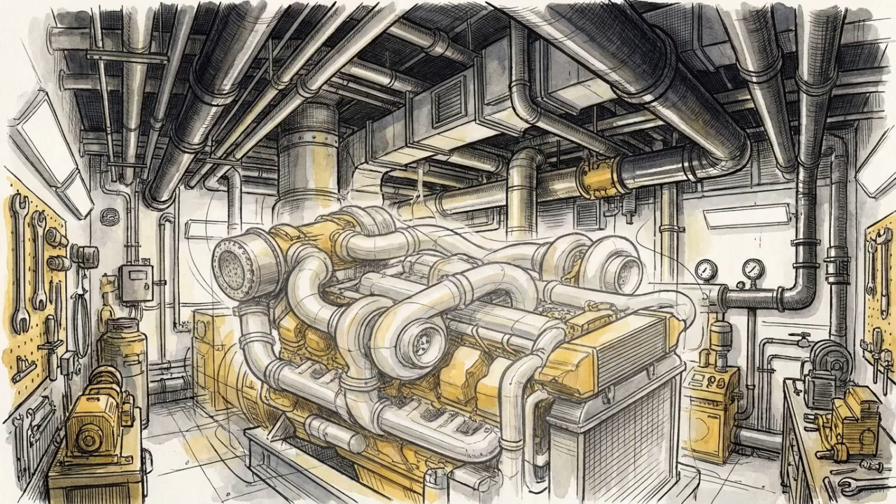Offshore oil platforms operate in some of the most unforgiving environments on Earth, requiring massive, uninterrupted electrical power just to keep their systems online and the crew safe. Enterprise data centers face a similar engineering challenge. They require mission-critical power generation, but have to fit it into severely constrained mechanical rooms or skid spaces.

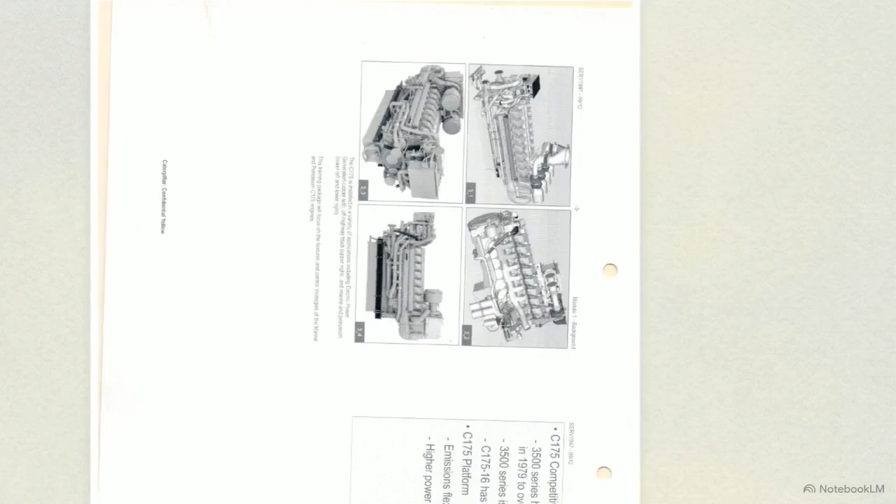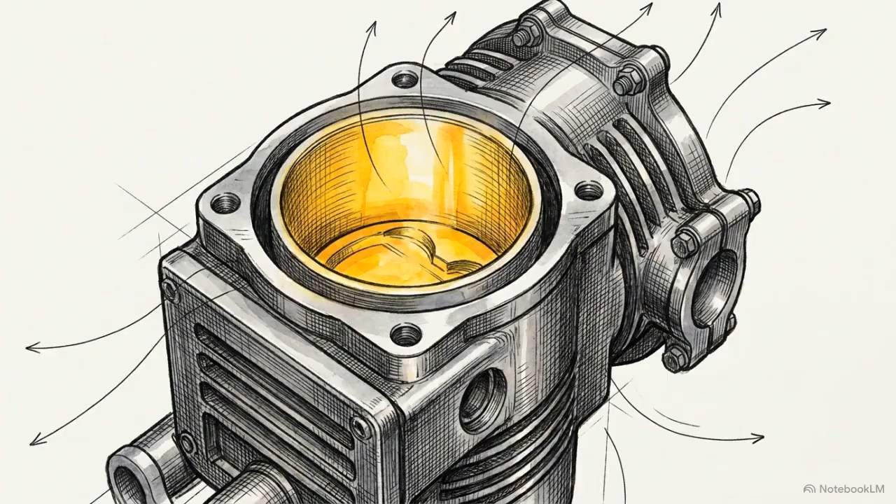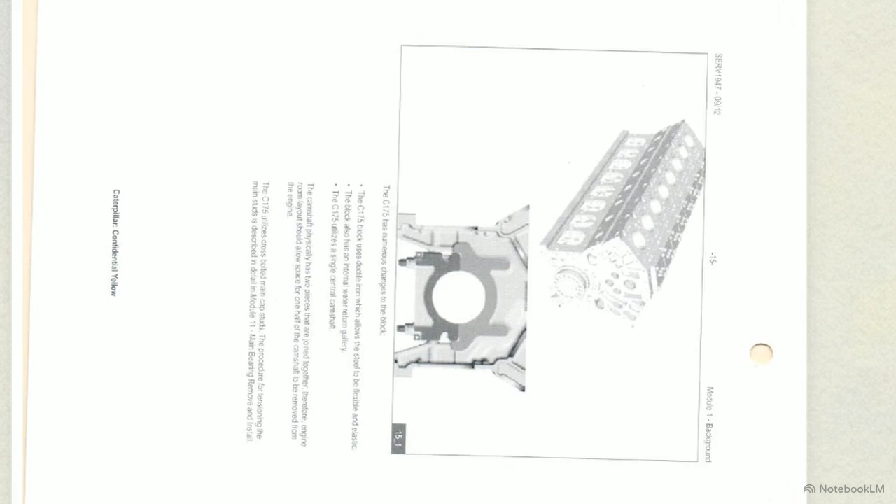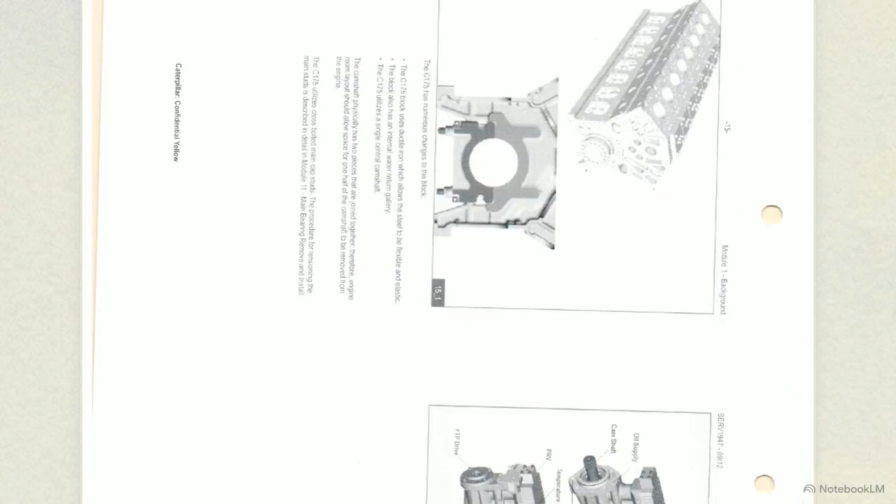Surviving it required a complete architectural redesign from the ground up. The foundation is the deep skirt engine block, cast from a high-tensile ferrite ductile iron alloy to prevent stress cracking under heavy, continuous loads. Inside, the geometry relies on a single central camshaft responsible for actuating 64 total valves across the entire engine.

The rotating assembly paired with this block utilizes one-piece forged steel pistons and a highly specialized connecting rod design. These connecting rods are precision fractured during the manufacturing process. The rod and cap separate along a jagged crack line, creating a unique microscopic interlocking surface that can only ever mate with its original partner.

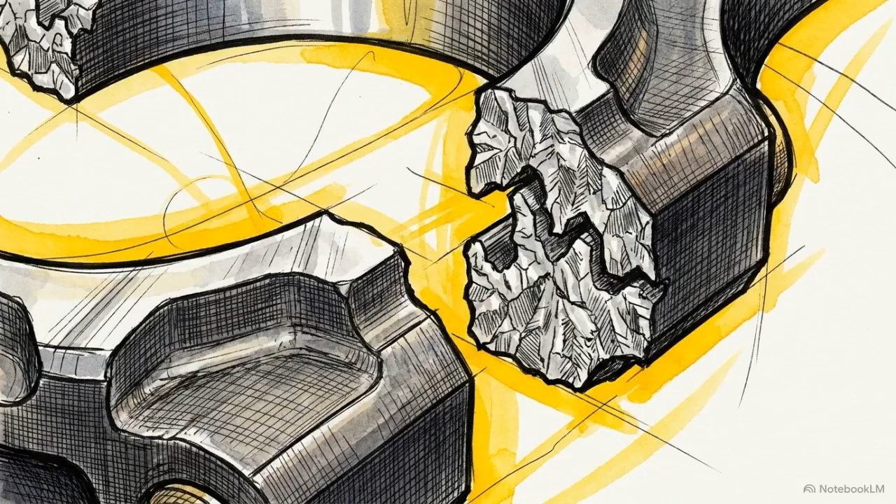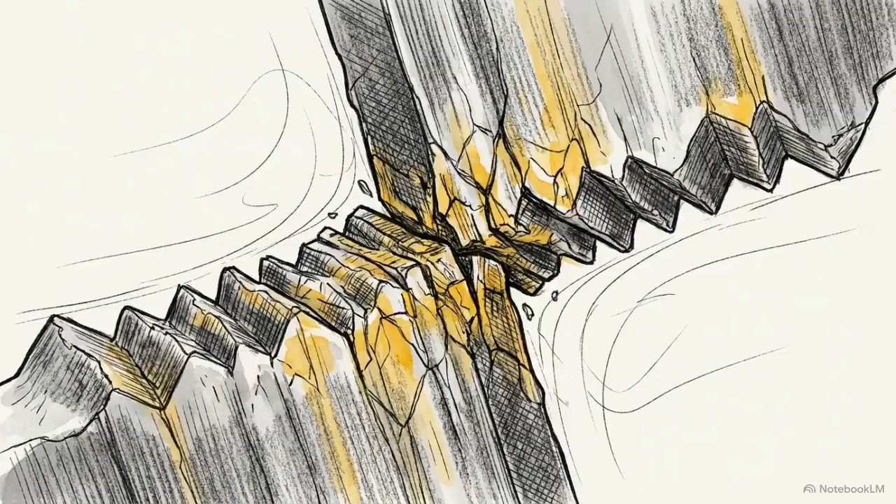A technician can never mix and match rod caps between cylinders, even temporarily during a bench rebuild. Swapping a cap destroys that fractured mating surface. Without that exact lock, the bearing shell can rotate under load, leading to total catastrophic rod failure at high speed. The mechanical foundation of the C175 offers zero margin for legacy mechanical slop or technician complacency.

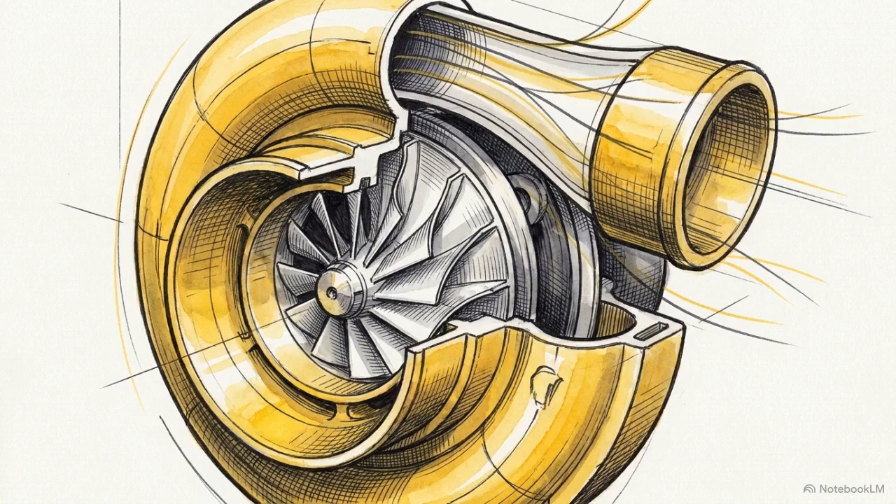Turbocharging the C175 is an exercise in maximizing molecular air density. The engine breathes through cross-flow cylinder heads, a design that strictly isolates the intake and exhaust ports on opposite sides of the cylinder to optimize gas exchange.

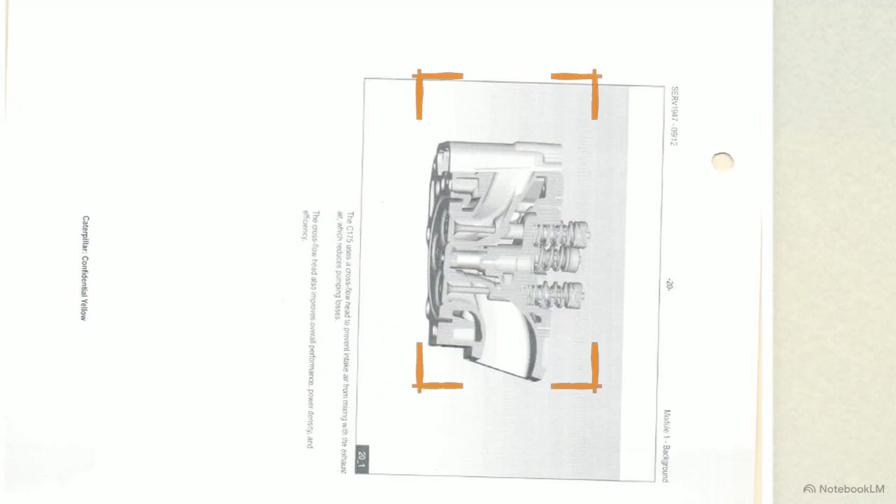Before that pressurized air enters the intake, it passes through the separate circuit aftercooler, or SCAC, which strips away the heat of compression to ensure the air remains dense with oxygen molecules.

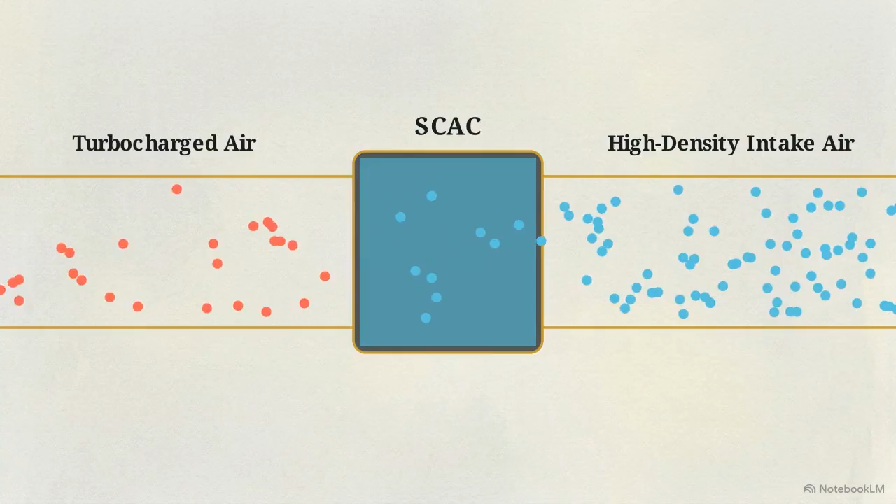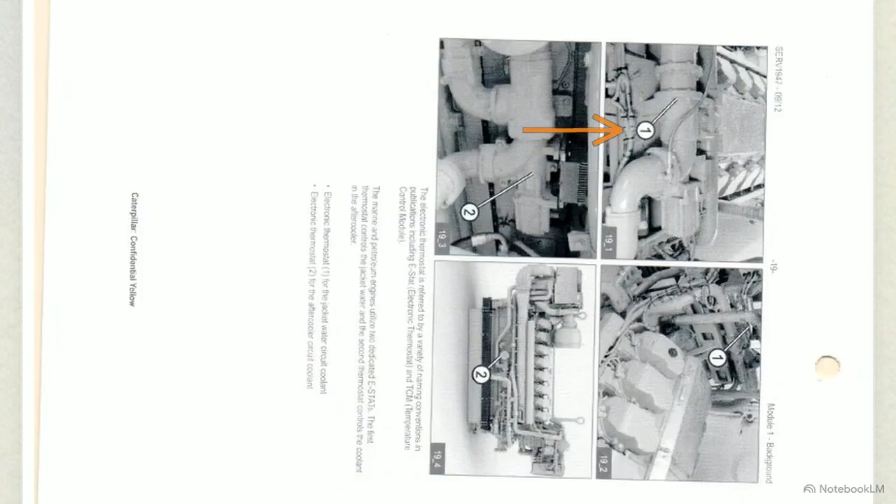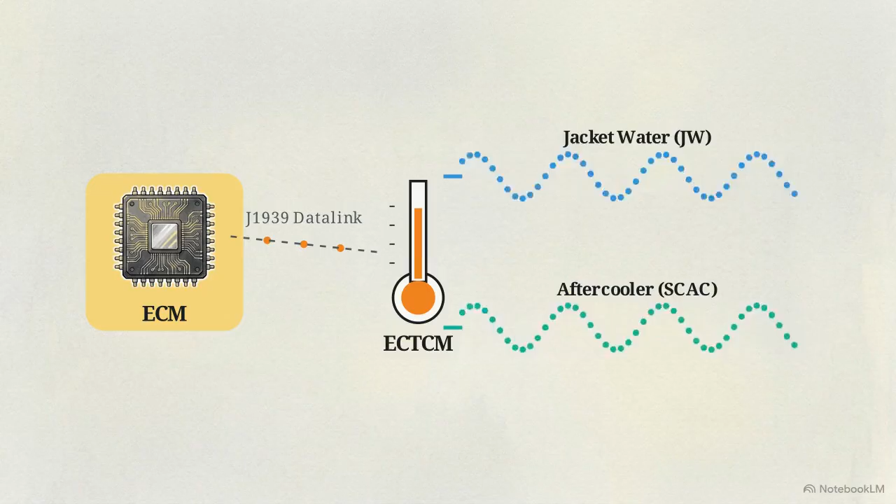Older platforms relied on passive mechanical thermostats for cooling. The C175 utilizes an electronic coolant temperature control module. The primary engine control module sends real-time J1939 data link commands directly to this module, actively dictating exact jacket water and aftercooler temperatures based on current load. Thermal management here is an active, digitally controlled loop.

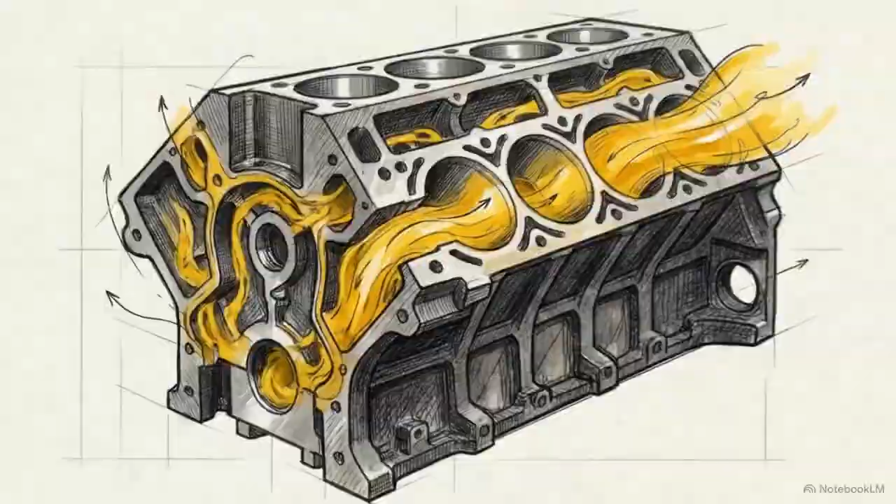Maintaining strict temperature parameters is a primary requirement for hitting the engine's power output targets. To deliver 3,500 horsepower while meeting modern emission standards, the platform abandons older mechanically actuated unit injection in favor of a high-pressure common rail fuel system.

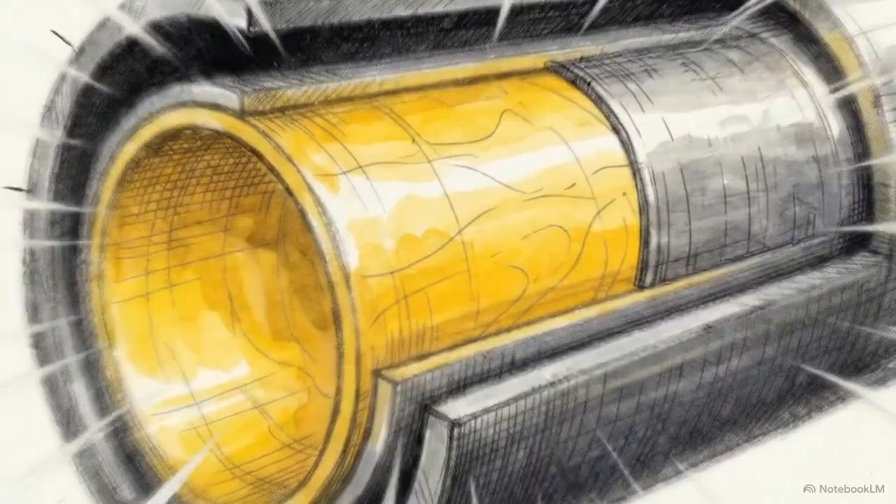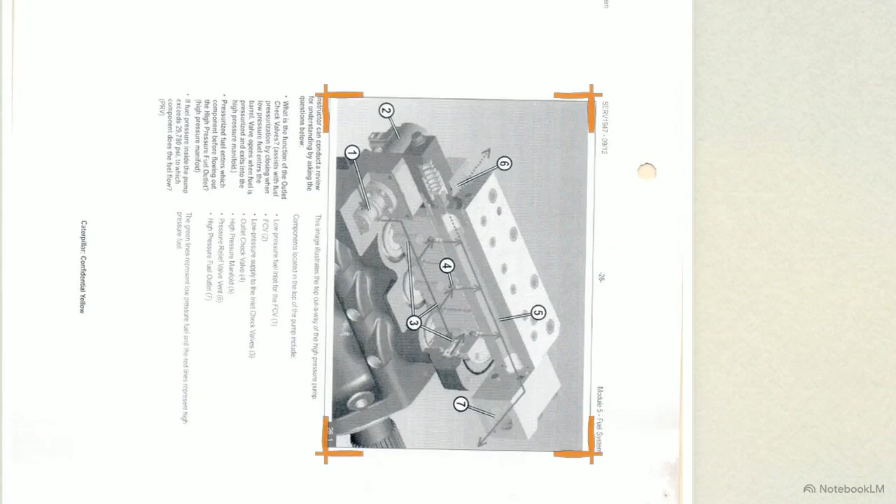This system operates at a lethal 180,000 kilopascals, over 26,000 psi. Containing that much kinetic energy safely requires specialized double-walled fuel lines. The mechanical source of this massive pressure is the Woodward high-pressure pump, mounted directly to the front housing.

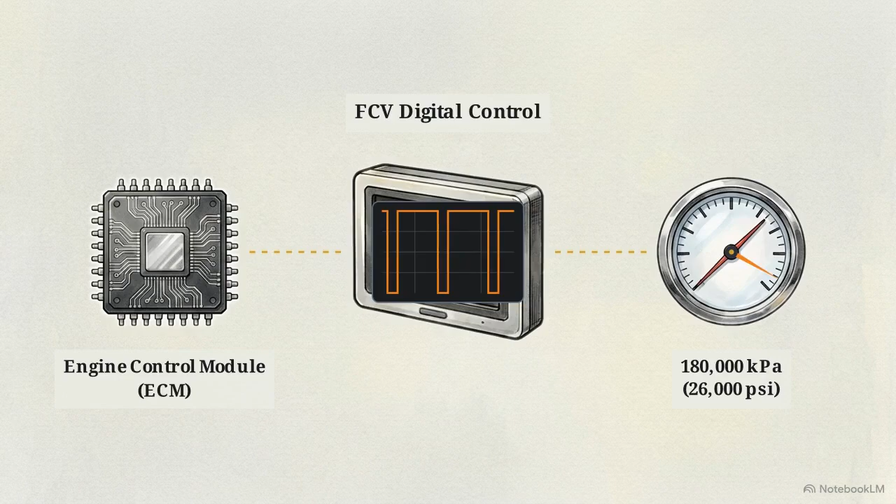The single most critical component on this pump is the fuel control valve. The fuel control valve acts as a gatekeeper. It receives a pulse-width modulated electrical signal from the ECM, constantly adjusting exactly how much of that 26,000 psi reaches the rail. From the pump, this highly regulated fuel flows out into the common rail manifolds, where it waits to be dispersed by the individual electronic injectors.

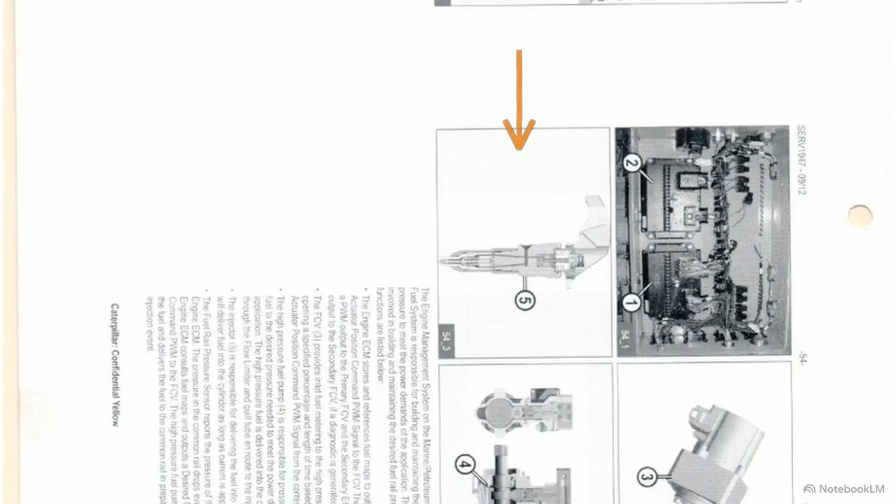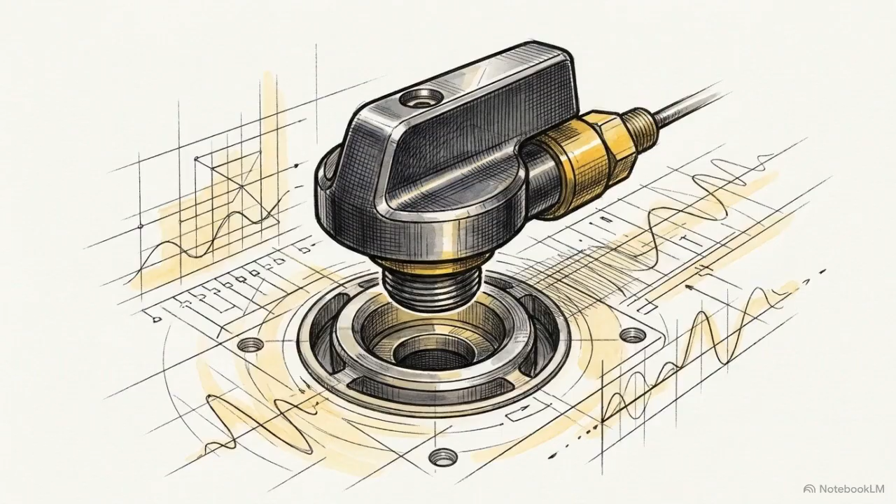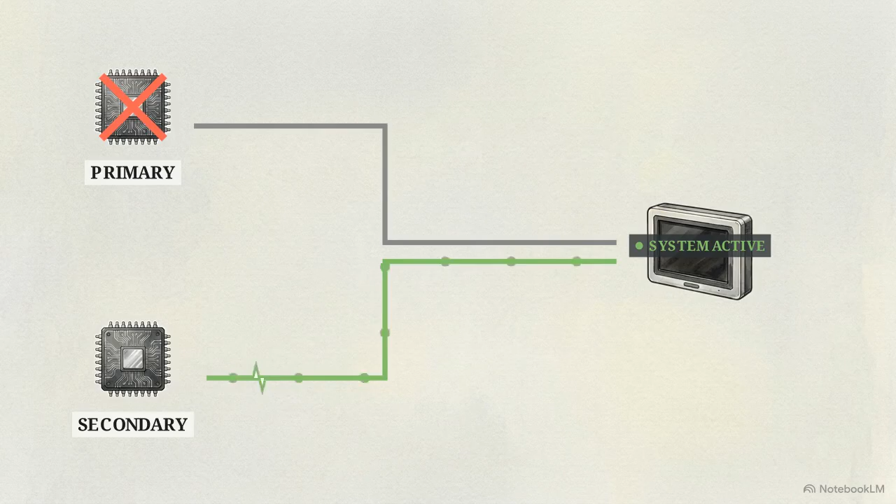The immense physical forces generated inside the block rely entirely on the fuel control valve's microscopic millisecond by millisecond digital gating. Because the fuel and thermal systems depend on continuous digital instruction, the engine requires absolute electronic redundancy to prevent catastrophic failure. Marine and petroleum applications achieve this using a dual-ECM architecture, pairing a primary control module with a secondary backup.

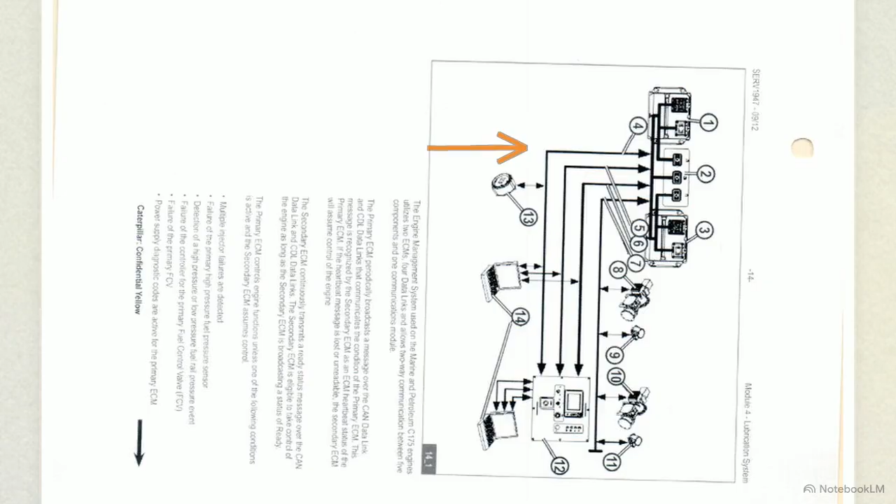The primary ECM continuously broadcasts its operational status, a digital heartbeat, over the CAN data link. If the secondary module detects that this heartbeat is lost or unreadable, it instantly assumes full control of the engine's functions.

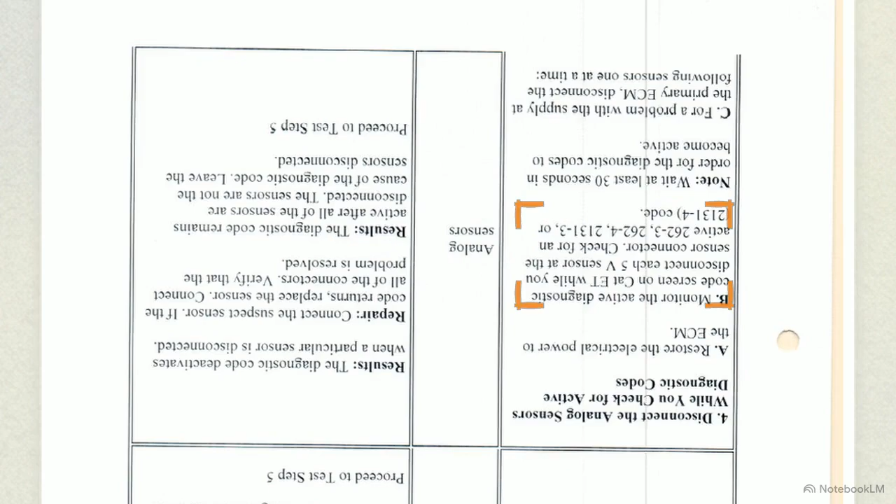When troubleshooting this digital architecture, technicians must verify the regulated 5-volt and 8-volt electrical supplies feeding the active sensors. Diagnosing these circuits requires probing the wiring harness for electrical opens or shorts and trusting the active diagnostic codes rather than relying on physical intuition.

Successfully repairing the C175 means shifting your diagnostic approach. You have to stop looking for traditional mechanical leaks and instead learn to read the digital data stream.

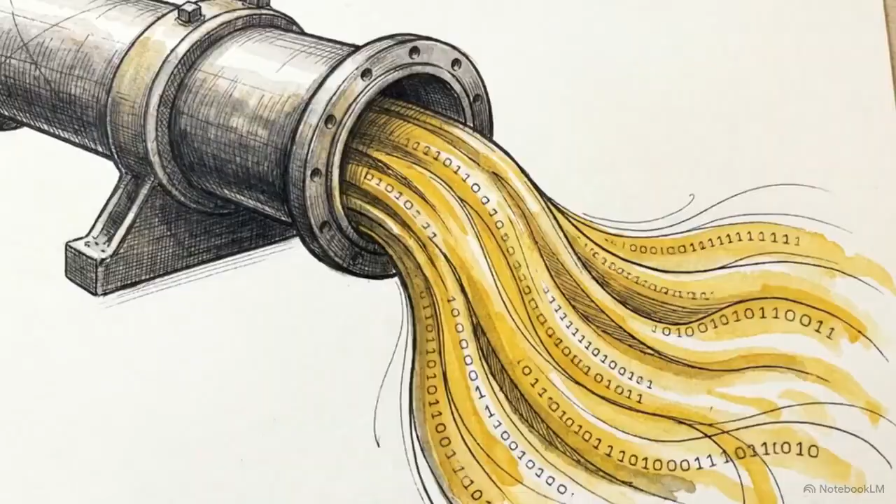Cranking an 85-liter high-speed diesel before oil has fully circulated will cause immediate catastrophic dry start damage to the bearing surfaces. To prevent this, the engine uses one of two mandatory pre-lube strategies: continuous, where oil circulates 24/7, or automotive, where cranking is physically locked out until sufficient oil pressure builds.

Beyond the initial startup, how the engine is deployed, specifically in a standby versus a prime application, radically alters its long-term maintenance schedule. Standby units face infrequent, full-load bursts. They require oil and filter changes based on a strict calendar limit of 1 year or 500 hours, with valve lash checks scheduled at 2,400 hours.

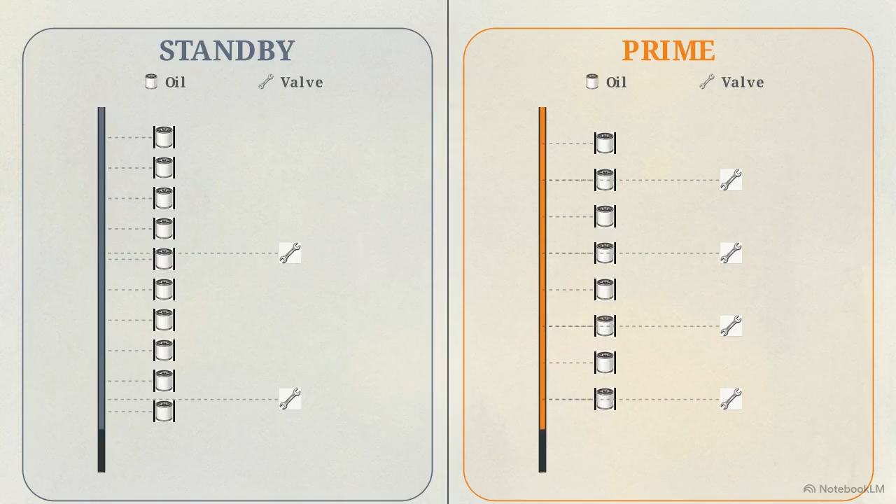Prime power units run continuously. While their constant operation extends oil change intervals out to 600 hours, the continuous heat cycles double the physical wear on the valve train, pulling the valve lash check down to 1,200 hours. These schedules reflect exactly how contamination and thermal fatigue accumulate in the real world across different industries.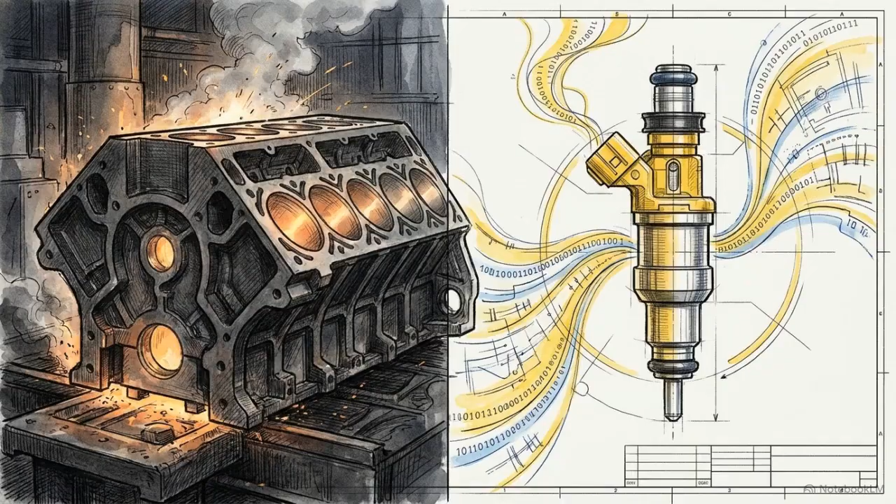The C175-16 generates its extreme power density through a careful balance: a highly rigid, unforgiving mechanical block paired with ultra-precise high-pressure fuel delivery. Treating this platform like an older 3500 series engine, swapping fractured rods, ignoring data links, or guessing at fuel pressures will destroy it.

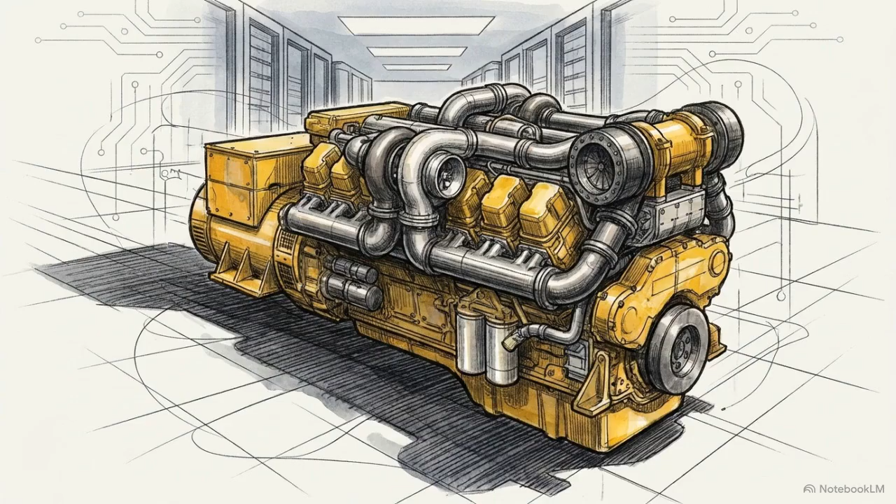Mastering the C175 requires a technician who respects its microscopic physical tolerances just as much as they trust its digital architecture.